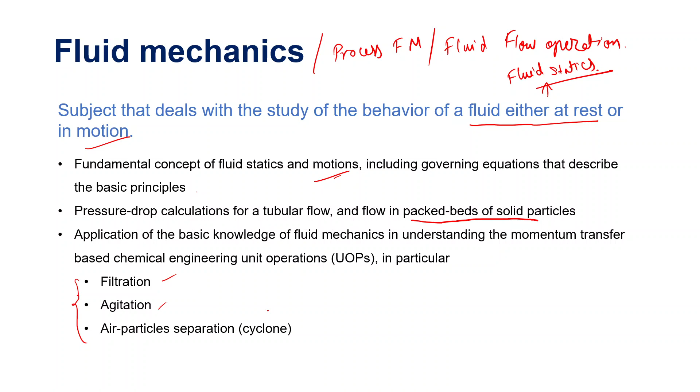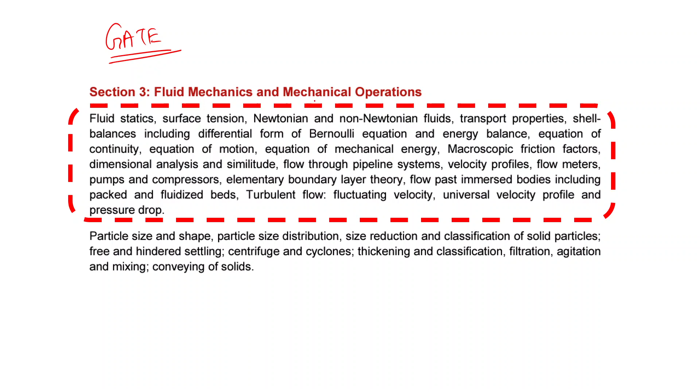From GATE point of view, if you see the GATE syllabus, this part is covered in section 3, which is fluid mechanics and mechanical operations. This first paragraph covers all the topics related to fluid mechanics, including fluid statics, surface tension, Newtonian and non-Newtonian fluids. This is an important topic from objective point of view.

Then transport properties, shell balances, including differential form of Bernoulli equation - this is also an important topic. Then equation of continuity, equation of motion, equation of mechanical energy, friction factor, dimensional analysis and similitude, flow through pipeline systems, velocity profile, flow meters, pumps and compressors. Ultimately, all of these topics will be covered in the fluid mechanics subject.

We will be dealing with all these topics in the coming sessions, and we'll be solving questions related to each of these.

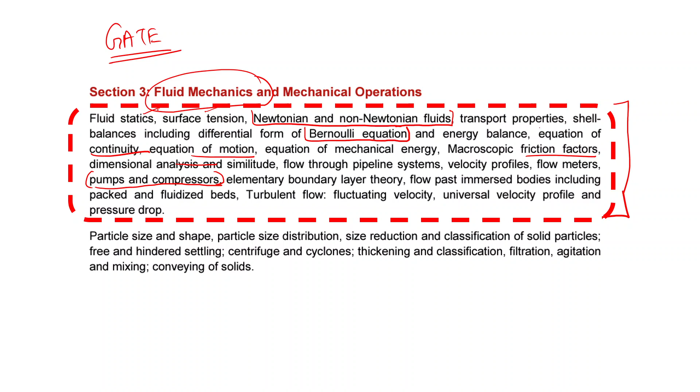Just for reference, there are many courses related to fluid mechanics available on NPTEL, and in chemical engineering field you can see multiple courses covering fluid mechanics and fluid flow operations. One such course is this web content - here you can find notes and slides related to this fluid mechanics subject, from Dr. Nishit Verma from IIT Kanpur. Then another subject which has a video course.

Video contents, I think 20-30 minutes long, are available in this course - Fluid Flow Operation by Dr. S.K. Majumdar from IIT Guwahati. The other courses you can find using the NPTEL website, covering fluid flow operations in other subjects also. For example, in mechanical engineering also they cover fluid flow operations, but these two courses are from the chemical engineering department.

We will just quickly cover within 5 to 10 minutes the basics of the questions that we are about to solve today. So the first question arises: what is fluid? As per definition, fluid is any substance that continues to deform or move under the application of shear force. Let's say if I'm having an object over here.

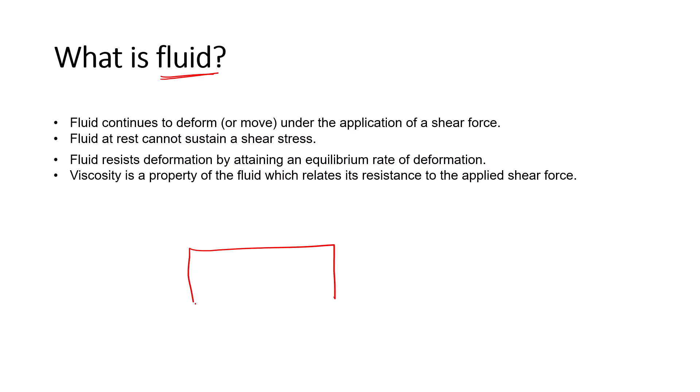Let's consider it a 3D object. Now, if at this surface, let's say I'm applying force on this side, then due to this force there can be a deformation in this object. So this kind of force, let me call it a shear force.

If this object is solid, then the object will try to resist this shear force, and ultimately it won't deform, and the shape would be retained to the original one. So the object would provide resistance whenever any force is applied to it.

Whereas in case of fluid, the fluid will resist, but it will continue to deform under the application of the shear force. So there will be a permanent deformation in case of fluid. And fluid at rest cannot sustain a shear stress.

So under the effect of shear stress, it will deform. That is what this means to say. So fluid resists deformation by attaining an equilibrium rate of deformation. As soon as some kind of force is applied, there will be deformation in the fluid.

The property of the fluid due to which it resists, which relates its resistance to the applied shear force, is known as viscosity. So due to this viscosity, there is permanent deformation, or the resistance is applied to the shear force in case of fluid.

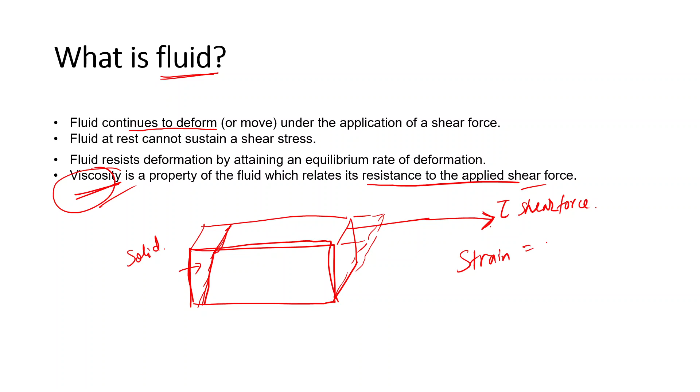So how do we correlate the viscosity with shear force or the strain rate? That is basically the deformation that is occurring. So that is given by this equation.

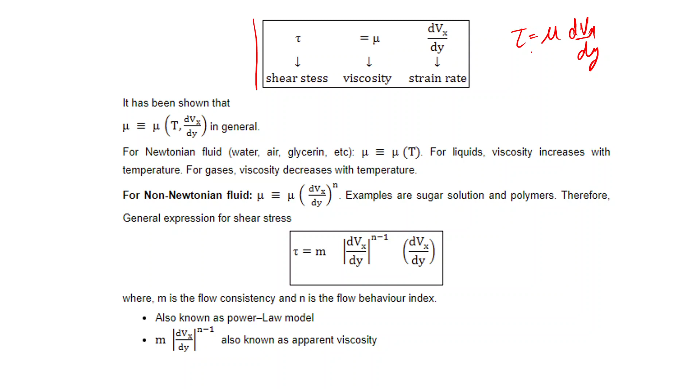So this equation you can write as tau is equal to mu dvx by dy, where tau is the shear stress that is applied. Mu you can call the viscosity, and dvx by dy is basically the velocity gradient, that is a change in velocity occurring with respect to y.

We call it the strain rate. So this equation correlates the shear stress with the strain rate, and the proportionality constant is what we define as viscosity.

In general, this viscosity term depends on the velocity gradient and also the temperature. So based on the temperature, the viscosity will vary. There are equations that correlate temperature with viscosity, which you will study in transport phenomena.

So for Newtonian fluid, mu is equal to mu of T. For liquids, viscosity increases with temperature. For gases, viscosity decreases with temperature. These are two important points.

Again, if we are having a Newtonian fluid, then the velocity gradient won't play a role, and the viscosity will only be a function of temperature. So for Newtonian fluid, viscosity is only a function of temperature.

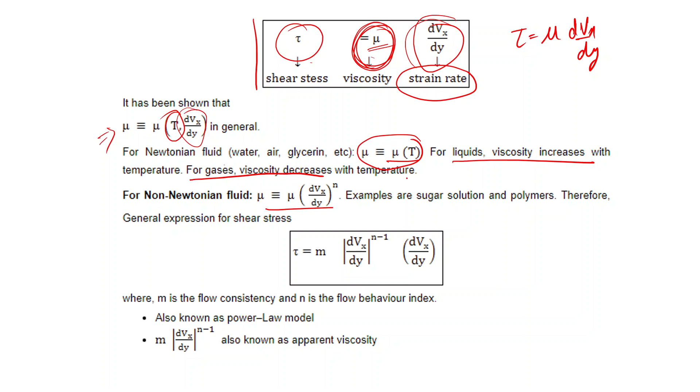And for non-Newtonian fluid, we can write this correlation, that is mu. This correlation we also call the power law model. The power law model correlates the strain rate with the viscosity, with the shear stress.

And this equation is only valid for non-Newtonian fluid. The other terms in this are: m is the flow consistency, and n is the flow behavior index. So based on the value of n, we can comment on what kind of non-Newtonian fluid it is.

Again, this equation is known as the power law model, and this entire term is known as apparent viscosity. So we can write this mu as m times dvx upon dy raised to n minus 1.

So this is our formula for apparent viscosity that comes from the power law model, and this will be useful in solving many numericals and also in commenting on the rheological behavior of the fluid for these non-Newtonian fluids.

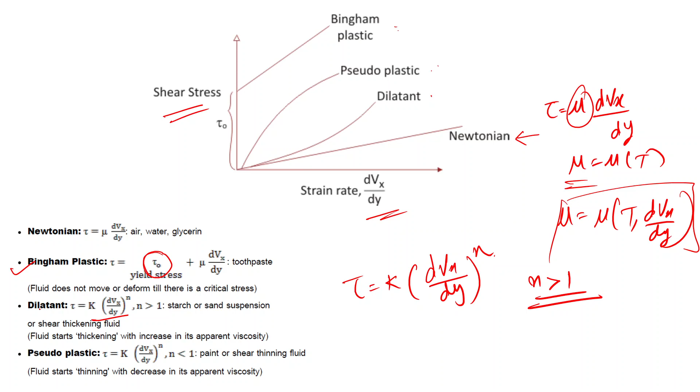Then the other kind of fluid is this dilatant fluid, given by this equation tau equals some constant raised to dvx upon dy raised to n. So if n is greater than 1, then we can call the fluid a dilatant fluid, and the graph you can see by this plot.

And if n is less than 1, then such a kind of fluid we call pseudoplastic fluid.

And if n is equal to 1, then this equation will simply become the equation for the Newtonian fluid, and that implies the fluid is Newtonian. Apart from this fluid, there are also time-dependent fluids.

So there are two kinds of time-dependent fluid. One is rheopectic, the other is thixotropic fluid. In this case, the viscosity or the strain rate will depend on the time until which the shear stress is applied.

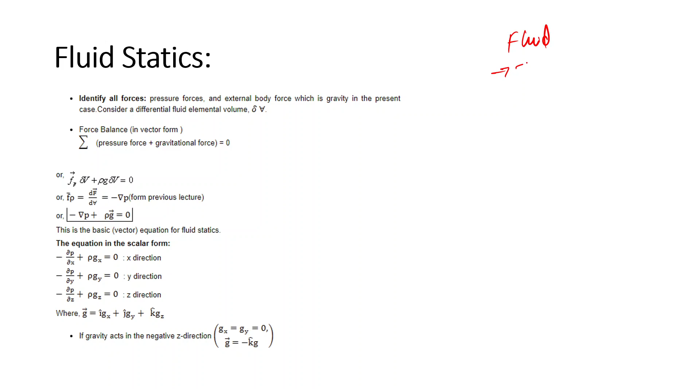Until now we studied, in the previous slides, about fluid and types of fluid. Now let's say if I'm having fluid, so this is a fluid just kept stationary, then all the studies related to this are known as fluid statics.

In this we have to identify all the forces, that is the pressure force, external body force. Gravity can also be applicable on this fluid. And once we do this pressure balance, once we do this force balance, then we can get this form that will give us the information about the fluid which is at rest. So this equation is important.

Delta P plus rho G is equal to 0. In scalar form, you can write it as delta P by delta Z plus rho G is equal to 0. You can also remember it as P plus rho G H is equal to 0. This is the pressure due to height h of the fluid.

So let's say if I'm having a tank and fluid is filled till height h, then the pressure at this point due to this fluid will be rho gh, and above which atmospheric pressure might act. So the pressure at this bottom will be Pa plus rho gh.

So this is the short introduction to fluid statics.

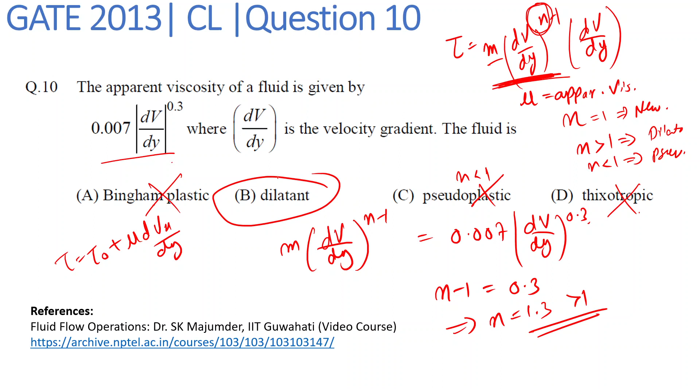For Bingham plastic, we have the form tau is equal to tau naught plus mu dvx by dy, and since we haven't been provided this form, Bingham plastic is not our correct answer. For pseudoplastic, n should be less than 1, so this is also incorrect. And for thixotropic, the shear stress or strain rate would be time dependent, and we haven't been provided any time sensitive information over here, so this is also incorrect. So the correct answer is dilatant fluid.

Now, this next question is from GATE 2014, Chemical Engineering. This question asks which of the following options are correct.

For a rheopectic fluid, the apparent viscosity increases with time under constant applied stress. Yes, rheopectic fluids are time-dependent fluids and their apparent viscosity increases with time under constant applied stress. So the first option is correct.

The second option states that for a pseudoplastic fluid, the apparent viscosity decreases with time under constant applied stress. But pseudoplastic fluid is a time-independent fluid, so the viscosity won't change with respect to time. So this option is incorrect.

The next option states that for a Bingham plastic, the apparent viscosity increases exponentially with deformation rate. For the Bingham plastic, the equation is tau equals tau naught plus mu times dvx by dvy, where mu is not dependent on deformation rate. It won't increase exponentially with deformation rate. So this is also an incorrect option.

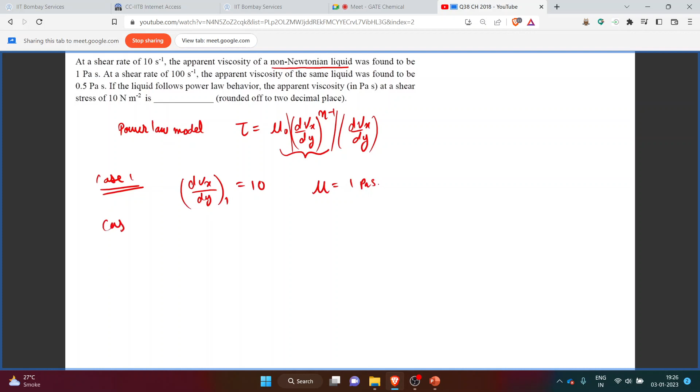Now for the second case, dvx upon dvy is equal to 100, and the viscosity of the same fluid was 0.5, so mu equals 0.5. Now we have to find the apparent viscosity at a shear stress of 10 Newton per meter square. So the apparent viscosity is mu naught times dvx upon dvy raised to n minus 1.

We have to find this value when the shear stress, tau, is 10 Newton per meter square. For that, we need to find the value of mu naught and n. Then we can substitute into this equation to find the apparent viscosity at that shear stress. So let's first utilize the information from case 1 and case 2.

We can write the relation between the apparent viscosities as mu2 upon mu1 equals 0.5 upon 1, which equals mu naught upon mu naught (which cancels, being the same), times dvx by dvy for the second case, 100, and for the first case, 10, raised to n minus 1. This gives us 0.5 equals 10 raised to n minus 1.

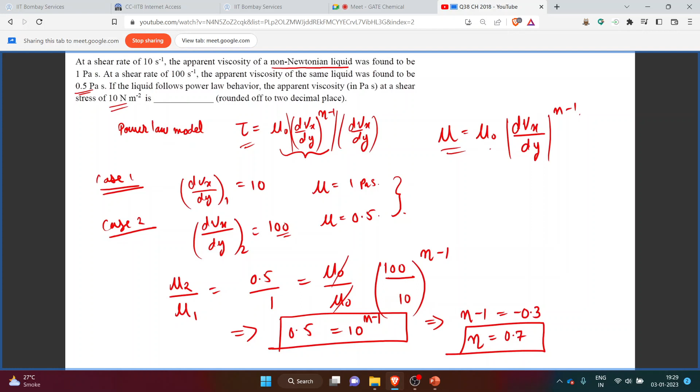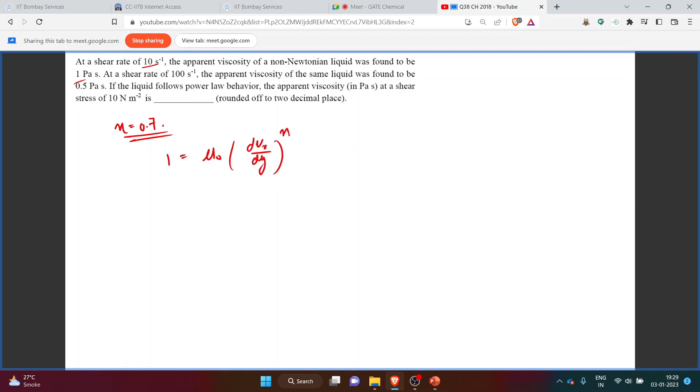Using either case 1 or case 2, we can find the next value, that is the value of mu naught. Let's use the information from case 1: mu is 1 Pascal second, which equals mu naught raised to dvx upon dvy raised to n minus 1. So 1 equals mu naught, strain rate was 10, and n we found out as 0.7.

From here we will get the value of mu naught as 1 upon 10 raised to minus 0.3. This will come around 2. So the value of mu naught is 2.

Now we have to find the apparent viscosity for a shear stress of 10 Newton per meter square. For that, first we need to find the value of the shear strain rate at this 10 Newton per meter square, that is dvx by dy.

So for a shear stress tau, where mu is the apparent viscosity, we can write tau equals mu naught times dvx by dvy raised to n. Tau has been given as 10, and the value of mu naught we found out as 2.

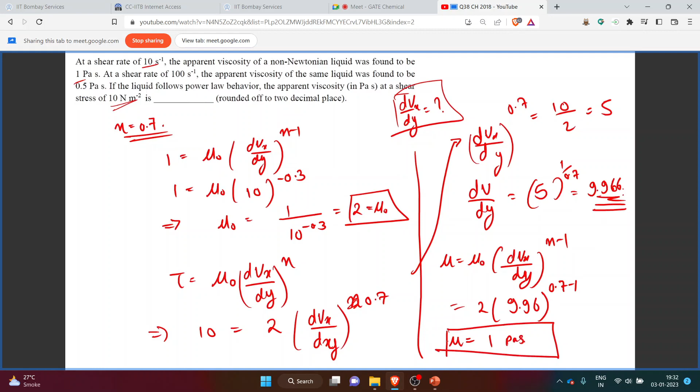Now we have to find the apparent viscosity, that is mu, in this case. Mu is mu naught times dvx upon dy raised to n minus 1. Replacing all the values: mu naught is 2, dvx upon dy is 9.96, and n minus 1 is 0.7 minus 1. Solving this, the value of mu, the apparent viscosity, will be 1 Pascal second. So the final answer we will write is 1.

I hope that question related to calculation of apparent viscosity, given different cases of shear rate and apparent viscosity, was clear. We can move on to the next question.

This is question number 27 from GATE 2021. The question states: consider a fluid confined between two horizontal parallel plates subjected to shear flow. In the first experiment, the plates are separated by a distance of 1 mm. It is found that a shear stress of 2 Newton per meter square has to be applied to keep the top plate moving with a velocity of 2 meter per second while the other plate is fixed. In the second experiment, the plates are separated by a distance of 0.25 mm. It is found that a shear stress of 3 Newton per meter square has to be applied to keep the top plate moving with 1 meter per second while the other plate is fixed. In the range of shear rates studied, the rheological character of the fluid is ___.

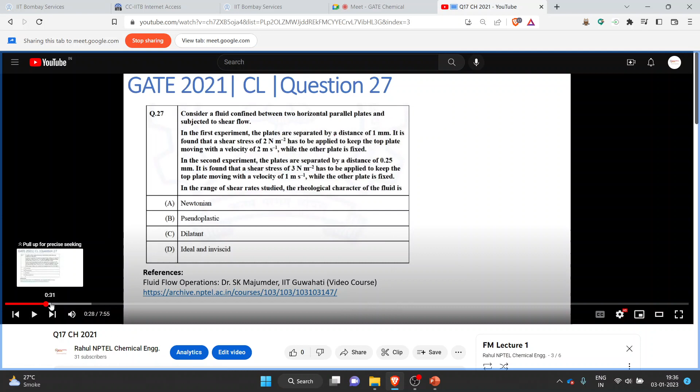We have been given two horizontal parallel plates. Let's say this is our top plate and this is the bottom plate. In the first experiment, the plates are separated by a distance of 1 mm.

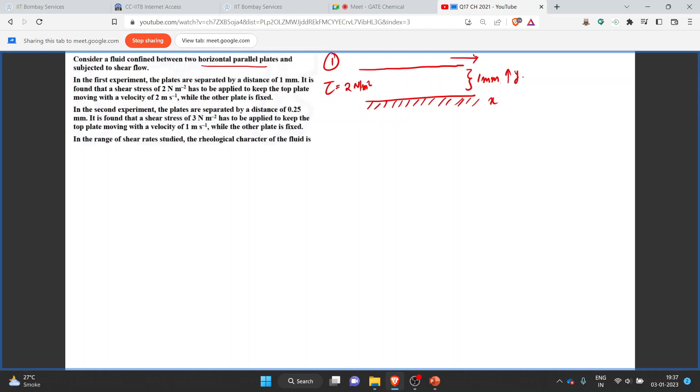It is found that a shear stress of 2 Newton per meter square has to be applied to keep the top plate moving. So tau is 2 Newton per meter square. The top plate is moving, whereas the bottom plate is fixed. This plate moves in the x direction, and this is the y direction. The velocity is 2 meter per second.

In the second experiment, the plates are separated by a distance of 0.25 mm. Shear stress applied is 3 Newton per meter square with a velocity equal to 1 meter per second, while the other plate is fixed.

Now we have to study the rheological character of the fluid. We can study this using the power law equation that states tau is equal to mu naught times dvx/dy raised to n minus 1, times dvx/dy. Based on the value of n, we can comment on the rheological character of the fluid.

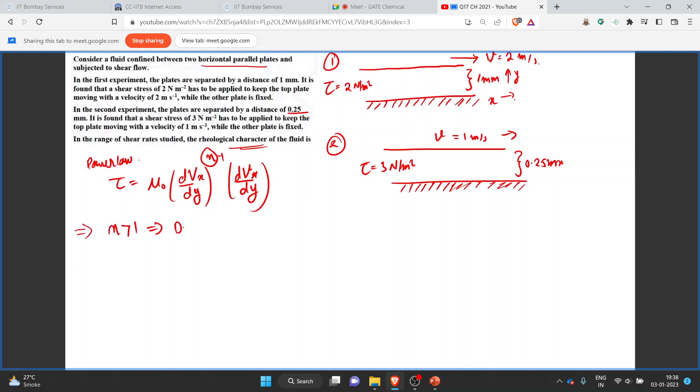If n is greater than 1, that implies the fluid is a dilatant fluid. If n is less than 1, that implies it is a pseudoplastic fluid. If n is equal to 1, then we can say it is a Newtonian fluid. And if there is any other form of this tau, then it won't lie in these three categories.

So to find the rheological character, we need to find the value of n. For that, we will use the provided information. First we have the change in velocity that is occurring: initially the velocity was 0, then we applied the shear stress of 2 Newton per meter square, and then the velocity became 2 meter per second.

From that we can calculate the strain rate, or the velocity gradient, and replace it in this equation with the data provided to find the value of either mu naught or n. So let's find the value of dvx/dy. Let's consider dy very small, so we can write this derivative as delta v upon delta y, that is v2 minus v1 upon delta y, which is basically this distance, so we write it as y. So we will be using this.

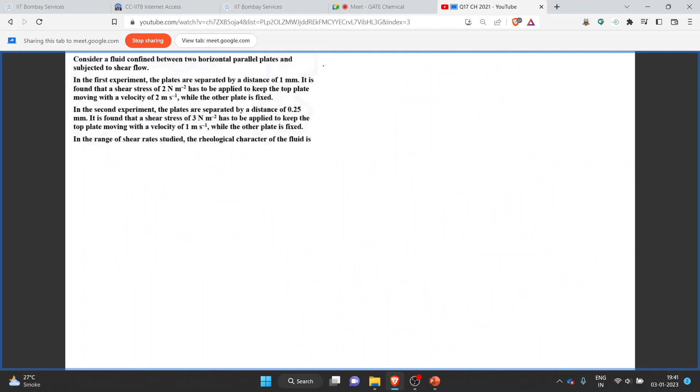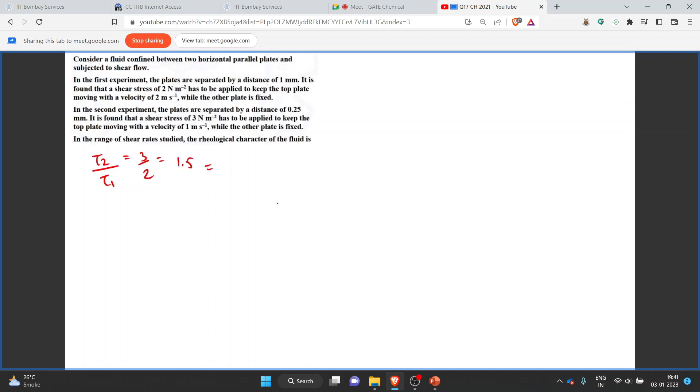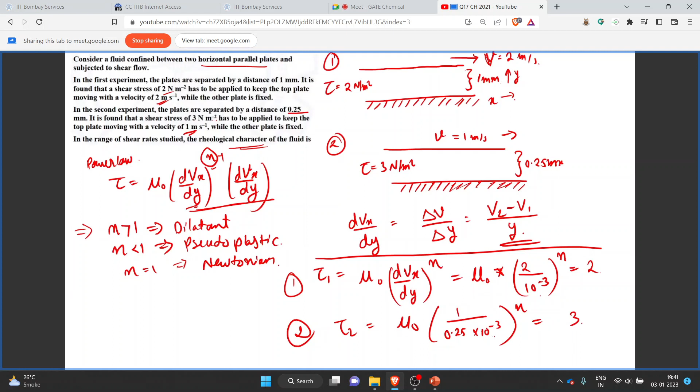Now we can take the ratio of equations 1 and 2: tau2 upon tau1 equals 3 upon 2, equals 1.5. Both mu naught terms get cancelled out, and we get 2 into 0.25, that is 0.5, which becomes 1 upon 0.5 raised to n, equal to 2 raised to n. Taking log on both sides, we can find the value of n, and it becomes n equal to 0.584.

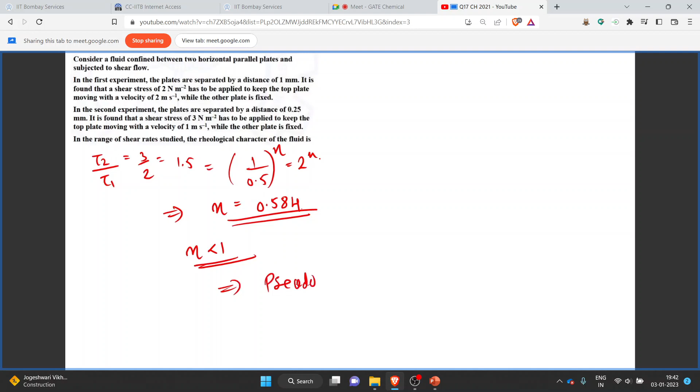Since the value of n is less than 1, we can say the fluid is pseudoplastic. This implies that the rheological character of the fluid is pseudoplastic. From the given options, we can select option B as the correct one.

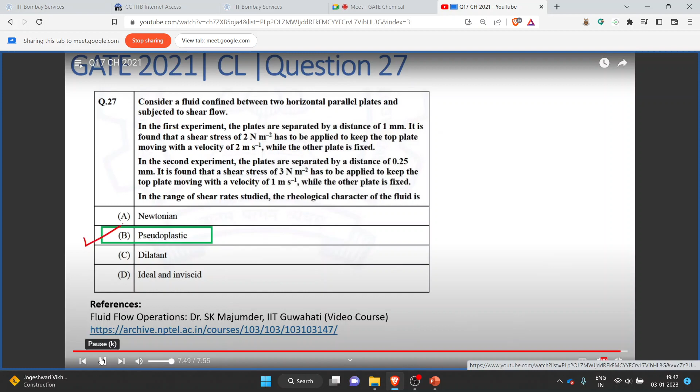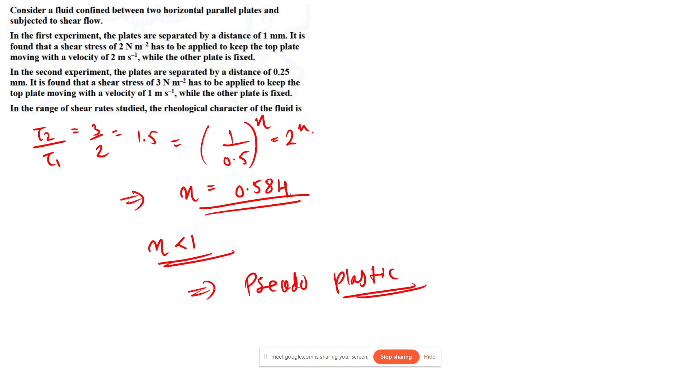Let's move on to the next question. In this question also we studied the kind of fluid by using the power law model. So in most of these questions, we have to use the power law model to find the value of n, and then find which category of fluid it belongs to. Or in other kinds of questions, using the power law, you have to calculate the apparent viscosity. That is also possible.

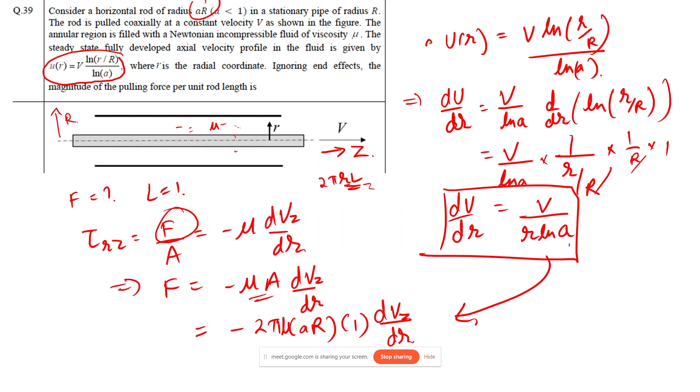Now let's take a look at the next two questions. This question is question number 39 from GATE 2022.

The question is: consider a horizontal rod of radius aR in a stationary pipe of radius R. The rod is pulled coaxially at a constant velocity V as shown in the figure. The annular region is filled with a Newtonian incompressible fluid of viscosity mu. The steady state fully developed axial velocity profile in the fluid is given by this equation, where r is the radial coordinate. Ignoring end effects, the magnitude of pulling force per unit rod length is dash.

So we have to find the force F required to pull this rod. Let's take a look at the video solution.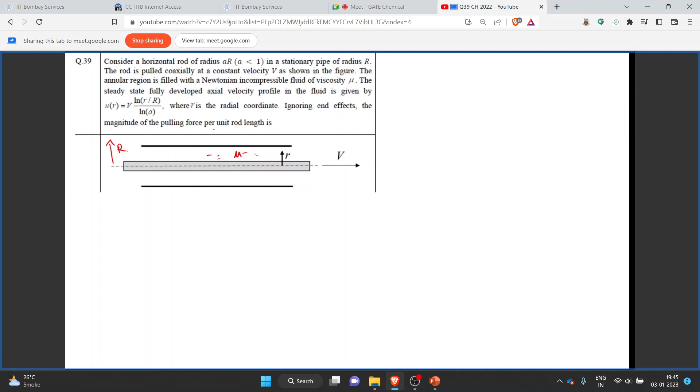Basically, in this question we have been given a rod of radius AR, placed inside a stationary pipe of capital R. Now this internal rod is pulled with constant velocity V, and the annular region is filled with a fluid of viscosity mu. We have to find the magnitude of pulling force per unit length, that is F where length equals 1.

So if this is our Z direction, we can write the shear stress as tau Rz, which is force upon area, equal to minus mu dVz upon dr. And since we have to find the value of force, F is equal to minus mu A dVz upon dr.

The contact area will be the surface area of this cylinder, so that is 2 pi R L, or minus 2 pi, and R we can write as AR, and length is given as 1. We have to find this strain rate dVz by dr.

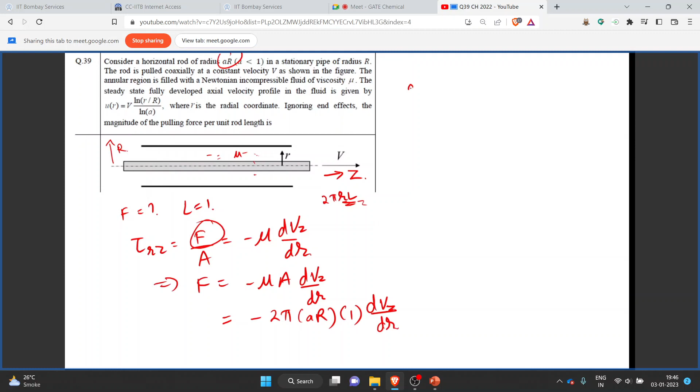In the given question we are provided that the velocity profile is UR equals V ln(R upon R) upon ln(A). To find this velocity gradient or strain rate, we differentiate this equation with respect to R, giving dU by dr equals V upon ln(A) times d by dr of ln(R upon R), which becomes V upon ln(A) times 1 upon R. So the strain rate becomes dV upon dr equals V upon R ln(A).

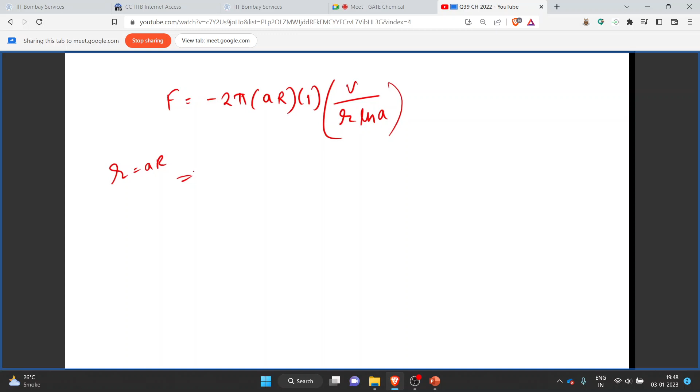Now putting this into the force equation, F is equal to minus 2 pi AR into 1, times dvz upon dr which is V upon R ln(A). If R is equal to AR, we get F equal to minus 2 pi AR V upon AR ln(A).

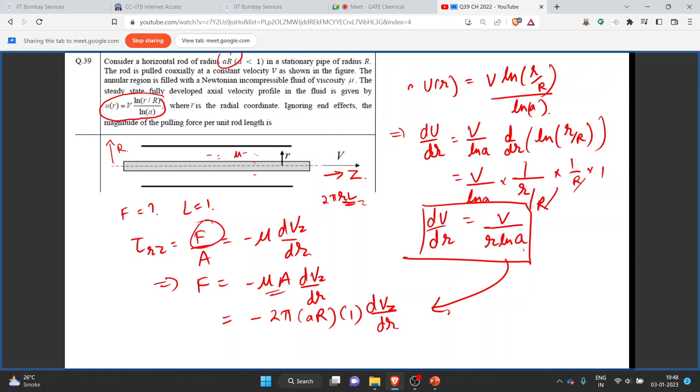I think we are missing something. Okay, over here we also have this mu. So the value of force will become minus 2 pi mu V, and this AR will get cancelled out, leaving it over ln(A).

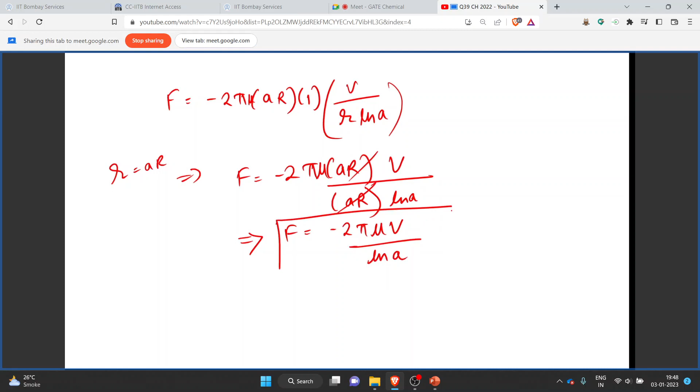Now from the given options, we can see that option B corresponds to the answer we found: the magnitude of pulling force per unit length is minus 2 pi mu V upon ln(A). So we will select option B as the correct one.

So in this question, we calculated the force required to pull this rod out, given a horizontal rod of radius AR within a stationary pipe of radius R.

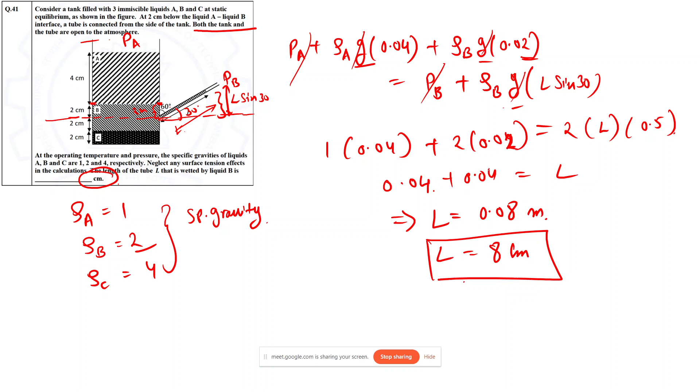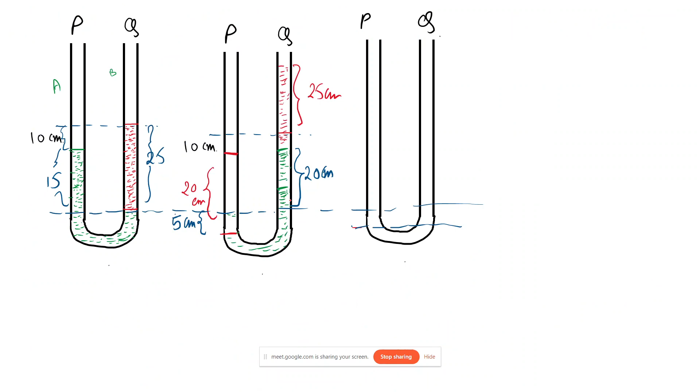Now let's take a look at our next question. We will be covering questions related to fluid statics. Let's just cover this question for today.

This is question number 41 from GATE 2022. The question is: consider a tank filled with 3 immiscible liquids A, B, and C at static equilibrium as shown in the figure. At 2 cm below the liquid A-B interface, a tube is connected from the side of the tank. Both the tank and tube are open to atmosphere. At the operating temperature and pressure, the specific gravities of liquids A, B, and C are 1, 2, and 4 respectively. Neglecting any surface tension effects, the length of tube L wetted by liquid B is dash centimeters.

We have been given this tank filled with three fluids A, B, and C. At 2 centimeters below this liquid AB interface, we have a pipe at a 60-degree angle, and we have been asked to find the length of the pipe until which it will be wetted. So until what level will this pipe be filled - that is what we need to find.

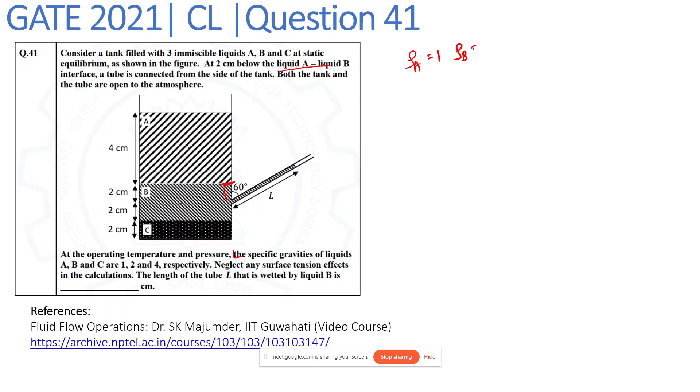For that we have been provided the specific gravity of the liquids A, B, and C. So rho A is 1, rho B is 2, rho C is 4.

We can consider this interface as our reference level, that is where H is equal to 0. Using this reference level, we can write the pressure balance on both sides and equate them to find the required length. At this surface, on the left hand side, let's consider this.

Over here the pressure PA, atmospheric pressure, will be acting. So the total pressure at this point will be PA plus rho G H for fluid A, which becomes rho A G times height of fluid A, plus pressure due to fluid B will be rho B G HB. This will be equal to, on the other side, atmospheric pressure PA plus rho GH, and we have to calculate this height H.

This angle is 60 degrees, so this becomes 30 degrees. So this entire height becomes L times sine 30. The pressure due to this fluid will be rho GH, where H is L sine 30, so that becomes rho B G L sine 30.

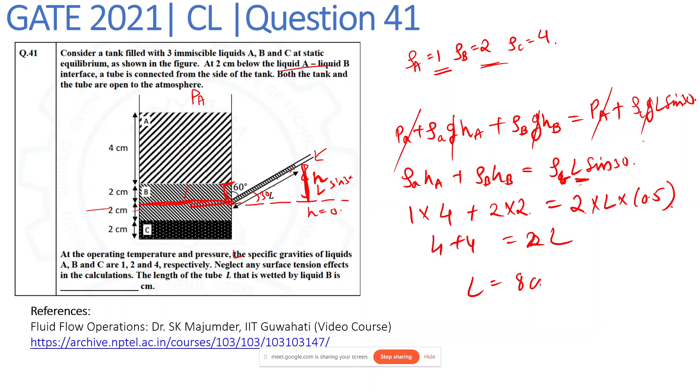So until 8 centimeters this pipe will be wetted. That is our final answer. So the final answer is 8 centimeters.

I hope all the questions covered in today's class are clear. In the next class we will also cover this example related to manometer, and then we will move on to fluid dynamics or fluid in motion.

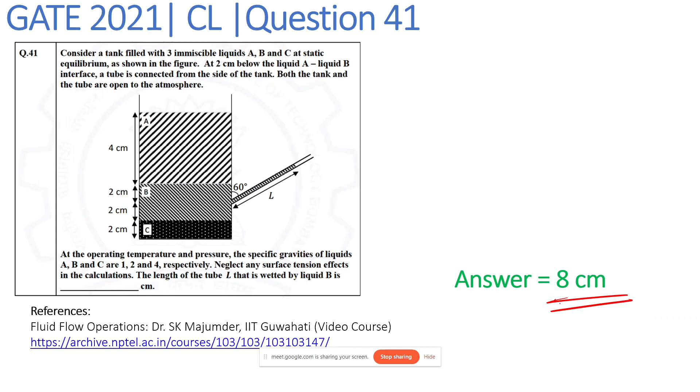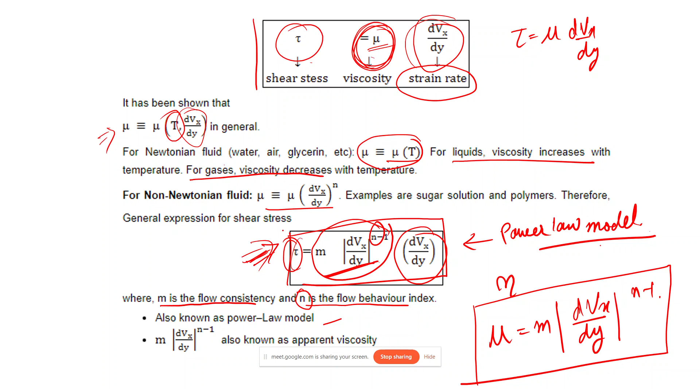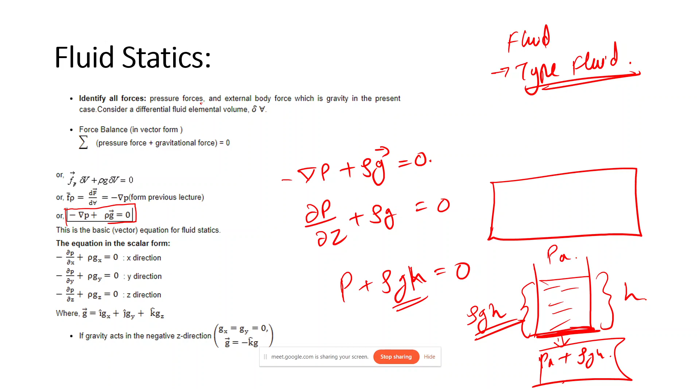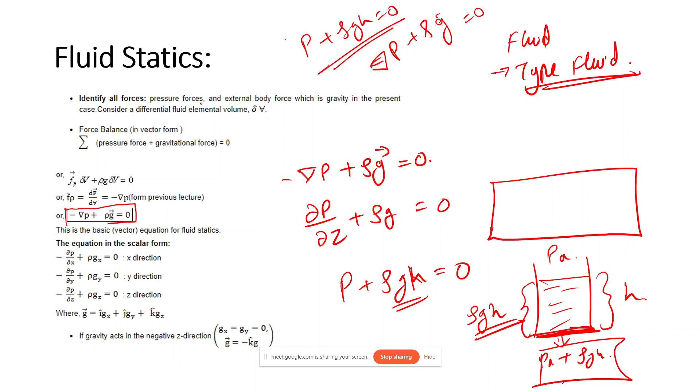In fluid statics, you can simply remember this equation: P plus rho GH is equal to 0. Or you can also remember this equation: gradient of P plus rho G is equal to 0. So these two equations are important.